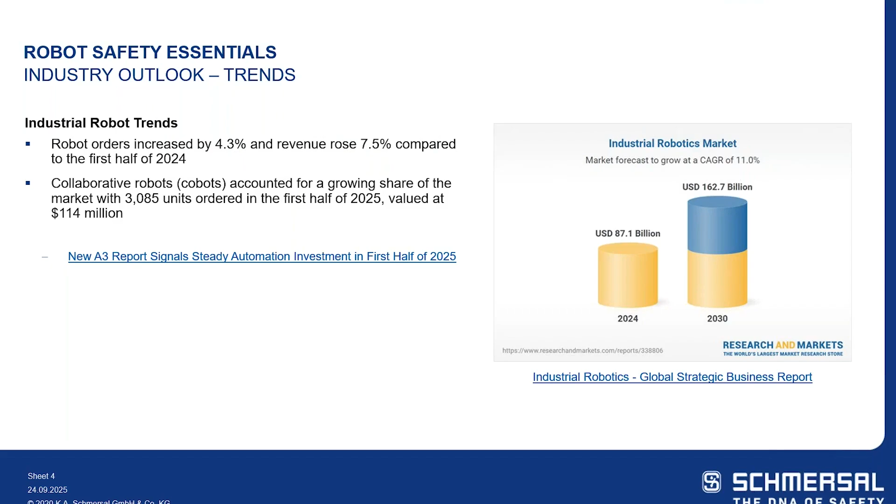I jokingly said I'm using air quotes when I use the term collaborative robots, and that's because that looks into some of the changes that have taken place with ISO 10218. Before I get into a high level comparison of the changes in the new standard that was just published, I want to take a quick second to look at the definitions of a robot and this collaborative term.

From 10218, we have the definition of an industrial robot, which is a machine that is automatically controlled, reprogrammable, or has reprogrammable multi-purpose manipulators, programmable in three or more axes, either fixed in place or fixed on mobile platforms for use in automation applications in industrial environments. So if you take out your checklist for this definition: automatically controlled, yes; reprogrammable manipulator, yes; you have an industrial robot, and these standards apply to you.

If we then look at the task associated with this robot, we ask: do we have a collaborative task, do we have a collaborative application? Again, look at the definition. A collaborative task is a portion of the robot sequence where both the robot application and the operator are within the same safeguarded space. A collaborative application is an application that contains one or more collaborative tasks, so they go hand in hand.

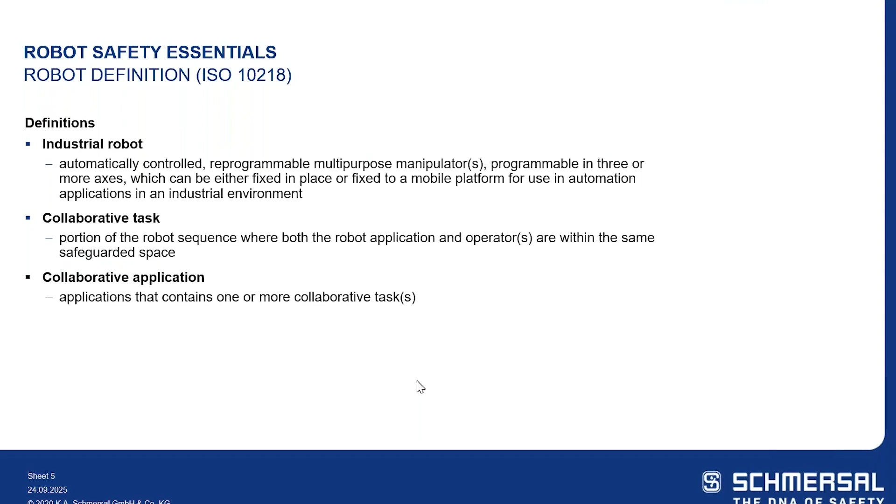So just a real quick look at the definitions as we prepare to dive into the standard. First thing is, do you even have an industrial robot? Sometimes that's the question. We might see a pick and place robot, but does that fulfill the definition of an industrial robot as far as 10218 is concerned?

This standard, ISO 10218, is a type C standard, which means it is for a specific type of machine. In this case, we are looking at the requirements specifically for robots, so 10218 is a type C standard for robots.

There is a part one and a part two. Part one looks at the general requirements for industrial robots, and I list here the scope as pulled directly from the standard. Part one specifies requirements for the inherently safe design, risk reduction measures, and information for use of robots in an industrial environment.

The standard also calls out the stakeholders, who should read this standard and who should be aware of it. They list robot manufacturers, application integrators, health and safety bodies, the regulators, robot application users including the employers and employees, and service providers such as maintenance personnel. Looking at that list, everybody who uses or touches this machine has some involvement in safety, from the manufacturer down to the maintenance personnel and the employees, so we have to take this standard into account, and again we look at the inherent safe design of this industrial robot.

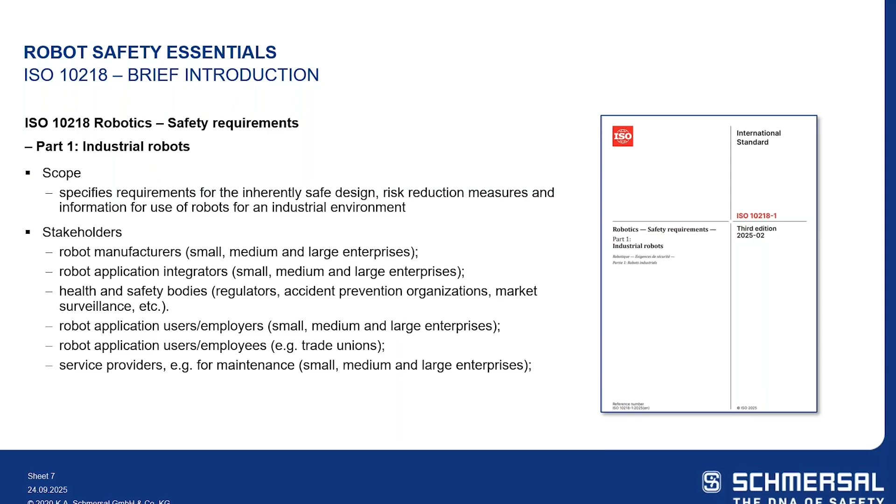Again, there are two parts. So we look at ISO 10218 part two, which looks at the integration of the robot. The scope here specifies requirements for the integration of industrial robot applications and industrial robot cells.

Who should be aware of part two? We look at the standard and it's the same list of people. If you are a manufacturer of robot cells, if you are integrating this robot into an application, if you are purchasing this robot, if you're using the robot, if you are servicing the robot, you will want to look into ISO 10218-1 and -2. Depending on your role, certain parts of the standard may apply more than others, but this standard applies to all the stakeholders involved with these industrial robots and collaborative tasks and applications, as we saw in the definitions.

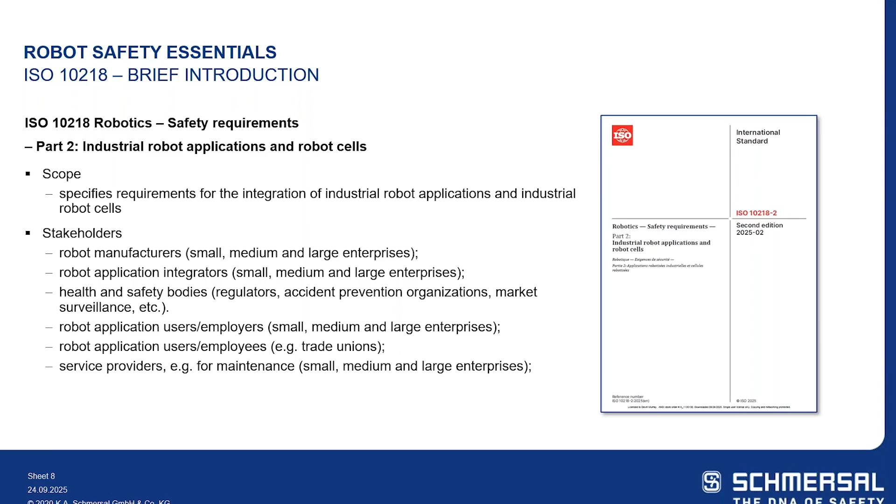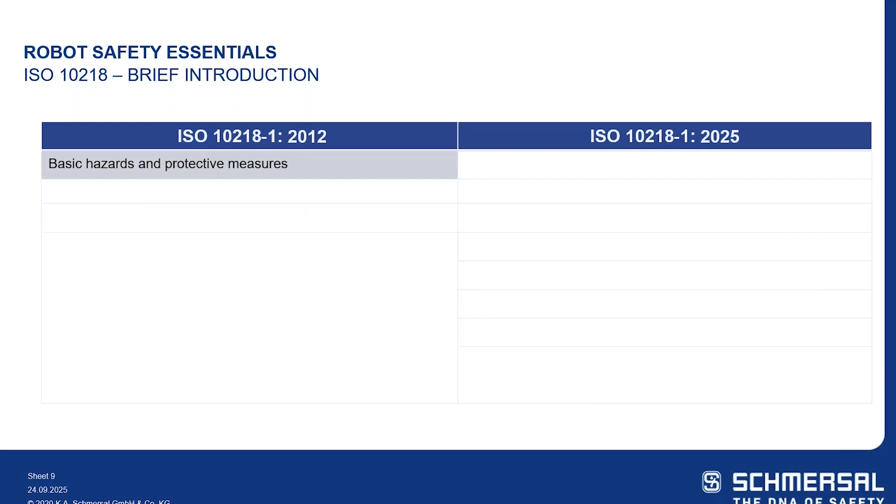So this is 10218. There's been a new or revised standard as of February of this year. We went from ISO 10218-1, last published in 2012, and looked at what that standard covers. It essentially covers basic hazards and protective measures for safeguarding robots, or the design of robots, for part one. They did talk about collaborative operations, but at a very high level. There was no mention of cybersecurity, and as you see with a lot of revised safety standards coming out now, they refer back to cybersecurity, thinking about industry 4.0 or the Internet of Things. So now we have to take that into account for our safety systems. This older standard addressed topics like stopping functions, safety-related control systems, and collaborative applications.

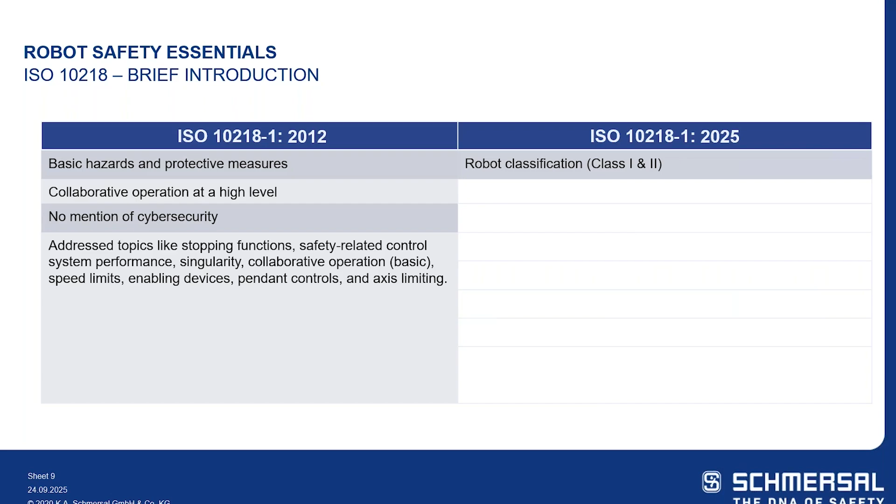But there were a lot of changes, a lot of things that they did not cover, as we now see in this list from 2025, and some changes as well.

With the 2025 revision, we now see this robot classification—there's a class one, class two. I'll describe that in the next slide, it's called out in this new 2025 standard. When you look at a class one robot, they will also give you some test methodologies to make sure you are within the specifications of a class one robot. They also, with this 2025 revision, talk about cybersecurity requirements, and they expand the capabilities of collaborative applications.

They updated their information for functional safety, because since 2012 there was a revision to ISO 13849, which is the standard for functional safety of machinery. The 2025 revision also incorporates the technical standard 15066, which was specific to collaborative robots.

The 2012 version spoke about collaborative operations at a high level. That's why there was the creation of ISO TS 15066, which went into more detail and also provided test methodologies to make sure that your pressure and forces, for example, did not exceed certain thresholds when you had those true collaborative applications.

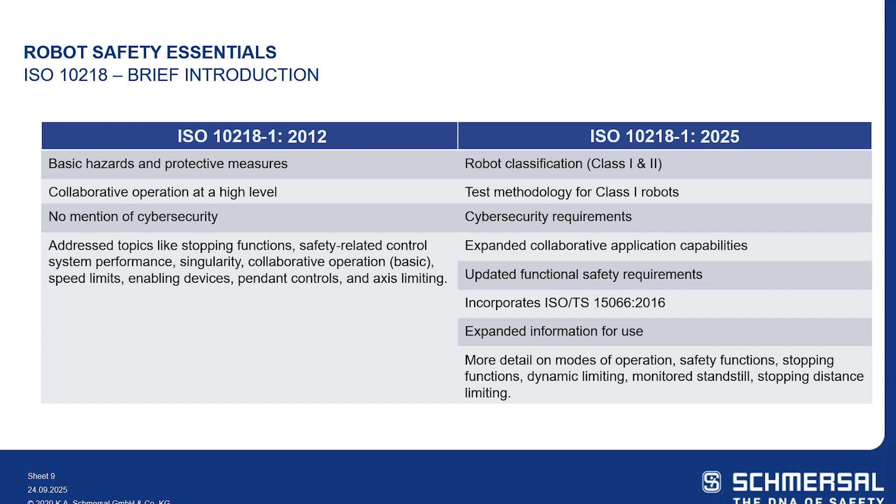They also expanded the information for use, providing more details for the modes of operation, safety function, stopping function, and dynamic limiting—again, more detail than what they presented in 2012. I'll come back to class 1 and class 2 in just a second.

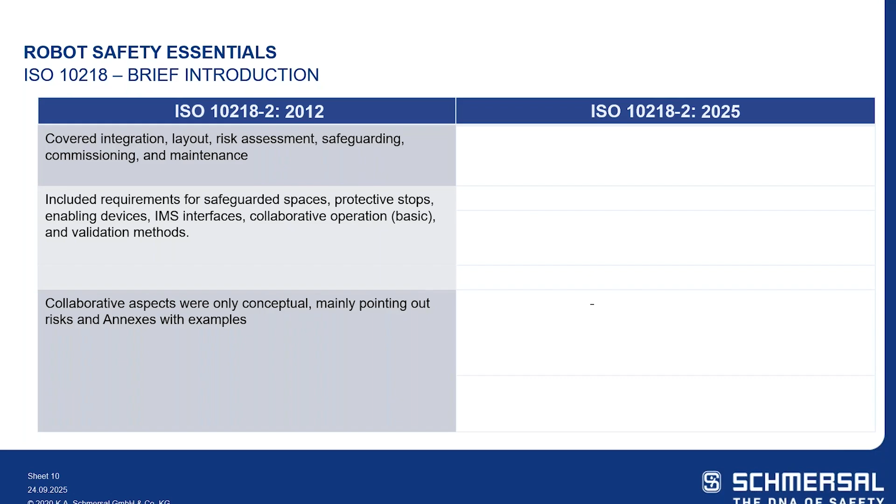When we look at the -2 version of 10218 back in 2012, they covered integration, layout, risk assessment, safeguarding, commissioning, and maintenance—trying to integrate this industrial robot into an application. They included requirements for safeguarded spaces and protective stops. Yes, they did mention collaborative aspects, but again at a high level, conceptually—much of why the ISO TS 15066 standard came out in 2016, to help guide those collaborative robot application questions and challenges.

What we see with the revision here in February 2025 is this shift from the idea of a robot system to a robot application. They now look at collaborative applications—this is now integrated into the standard. A lot of information from 15066 has been incorporated into the revised standard. They expanded the functional safety requirements with the updated ISO 13849 standard. With the integration of an industrial robot, they looked into cybersecurity, providing requirements, whereas before there were none.

New sections on end effectors, vertical transfer components, and expanded information for use. Another big one: the terminology updated from 'collaborative robot'—which is why I was using air quotes you couldn't see—to no longer using that term, and now looking at the term 'collaborative application.' This was huge, one of the biggest changes, because when we looked at this idea of a collaborative robot, I found, and I think it was widespread within the industry, a huge misconception of utilizing a collaborative robot—yes, it's inherently safe designed, so slower speeds and supposedly no pinch points.

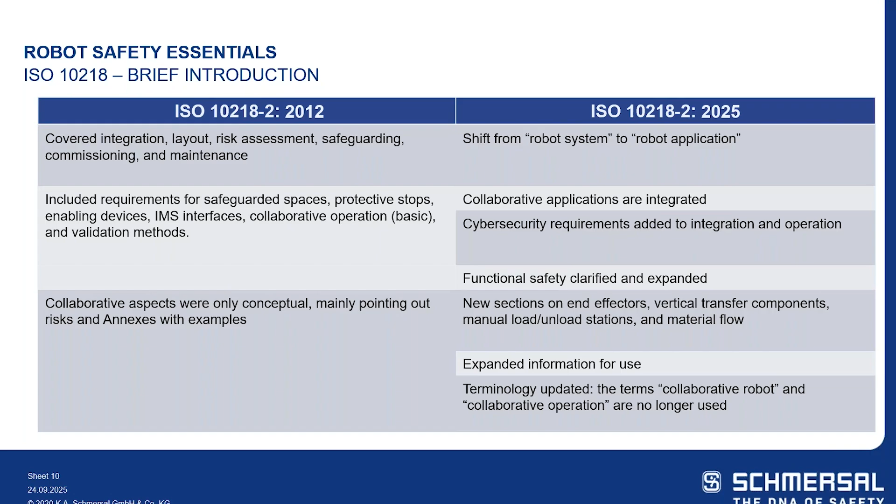Huge changes from 2012 to 2025, and there were quite some years in between the standards. So as we can imagine, there should be some sweeping changes for the positive for safety with these robot standards.

Really quick, I mentioned that we now look at these classifications of robots in ISO 10218, so there's two classes, class 1 and class 2. Here's a table pulled directly from the standard to give you an idea. The classes of robots are categorized by the mass per manipulator, the maximum force per manipulator, and the maximum speed of that robot.

If we look at the values of a class 1 robot, the mass per manipulator is 10 kilograms and under, and the force per manipulator is 50 newtons and under. The maximum speed is under 250 millimeters per second. Those are essentially the specifications that were for the collaborative robot term that's no longer being used.

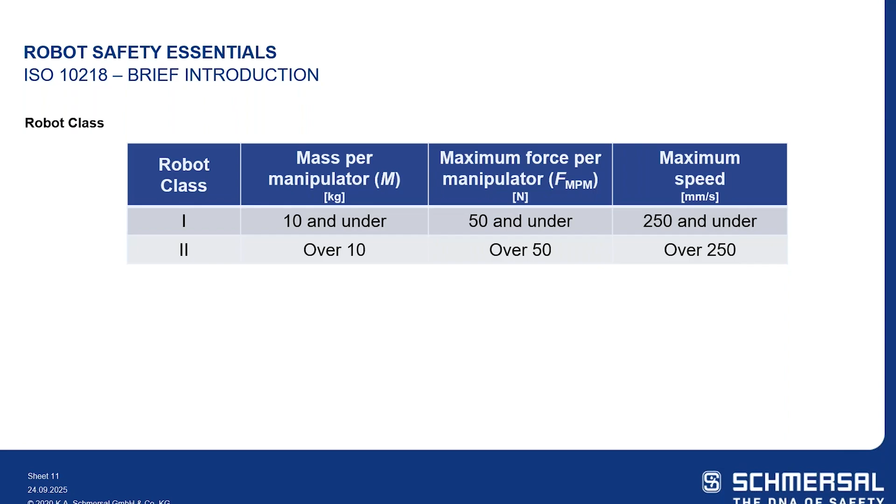Now we look at these specifications and say, if we are trying to have a collaborative operation, we want to see if we can use these class 1 robots. We no longer say we have this collaborative application, let's use this collaborative robot and call it a day. No, it's let's look at this class 1 robot for this application, and then the standard gives us some testing methodologies to actually test the pressure and forces of the robot, to make sure these forces and pressures do not exceed certain thresholds of the human body, so that we can utilize these in a collaborative task, side by side with the operator.

We can talk about this more later toward the end of the presentation. But again, some huge changes within the standard. A lot of the information they are describing with the testing is taken from ISO TS 15066.

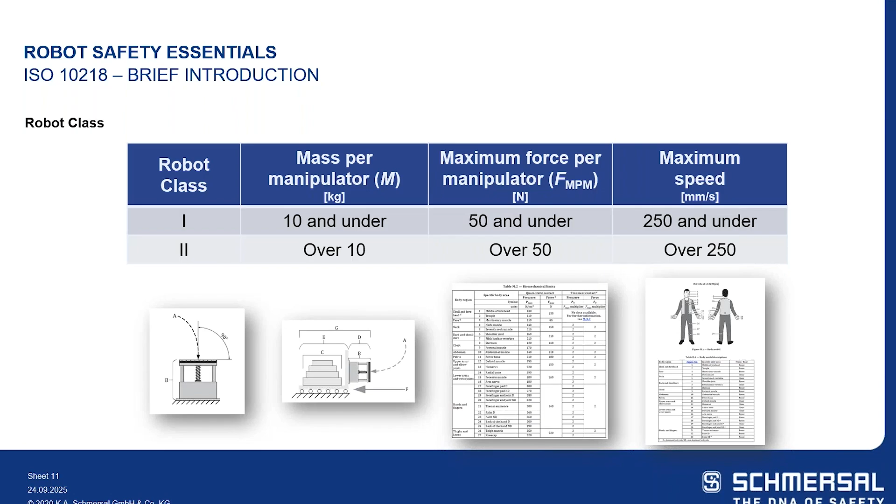Thank you, Devin. Now we will get into the safety requirements in practice, both for products and for our Tec.nicum services. The Schmersal Group is one of the international market leaders in the field of machine safety. We've got over 80 years of technical knowledge and special industry expertise in many fields of application, including food and beverage production, packaging technology, machine tool construction, lift technology, logistics, heavy industry, and the automotive sector, and especially in the field of robot safety.

So we offer a wide variety of robot safety products, from cutting-edge electronic safety devices to simple position sensors and various control accessories. We'll now discuss an overview of a selection of products that satisfy the requirements of ISO 10218 robotic standard, as well as our Tec.nicum group. Schmersal provides product and manufacturer neutral engineering services. We will feature some Tec.nicum solutions to help you comply with the requirements of ISO 10218 robotic standard.

Perfect, all right, so what I want to discuss and what you'll see moving forward here, let's look at the standard, and then let's look at some solutions. So if you look at some of the requirements from the standard, ISO 10218-1, and we look at the emergency stop section here, there'll be a lot of information from the standard. I won't read every word or every bullet point.

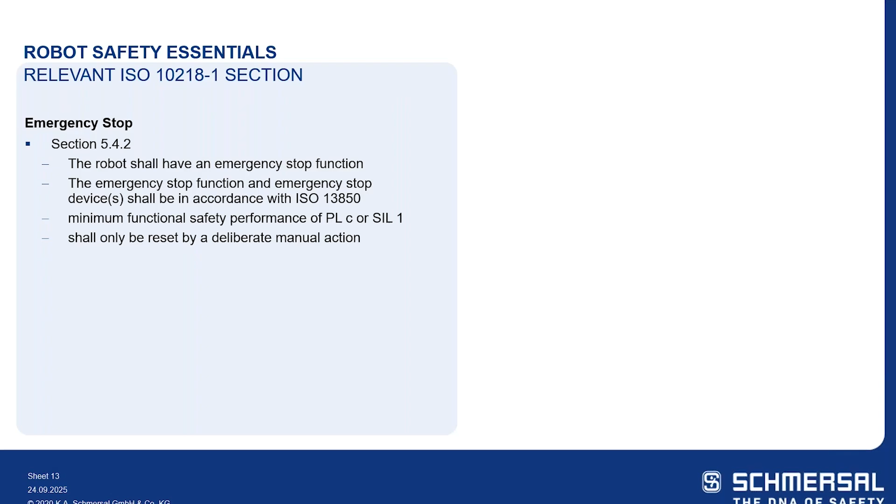They also call out that the e-stop shall only be reset by a deliberate manual action. This is also a requirement for an e-stop as called out by ISO 13850, in section 5.4.2.

In addition to the requirements of 10218, both NFPA 79 and ISO 13850 detail the physical characteristics of a push button type emergency stop operator, that red mushroom operator with the yellow background, that it be self-latching, and that once actuated it remains in that state until a voluntary and deliberate action has been performed, like twisting or pulling the palm button for manual reset. Resetting the e-stop alone does not resume operation; a second deliberate reset action is needed, such as pressing a manual reset button.

Both OSHA and standards such as IEC 60204-1 state that the emergency stop must be readily accessible to the operator. That means every operator station, or any area of the machine worked on that is part of normal operating procedure, needs a means for emergency stop, and it should be unobstructed and easily accessible without having to reach over, under, or around to actuate it.

I'll highlight two possible solutions. We have a full complement of emergency stop operators to meet various environmental conditions. I offer two simple kits. One is the BDF 100 series, a slim 40mm housing, impact resistant thermoplastic housing. That e-stop operator is available with or without a protective collar around the red button, has an integrated LED status indicator above the operator, and pulls to unlatch or reset the e-stop operation. It's fully wired with an M12 8-pin connection, so it's easily wired into the electrical panel.

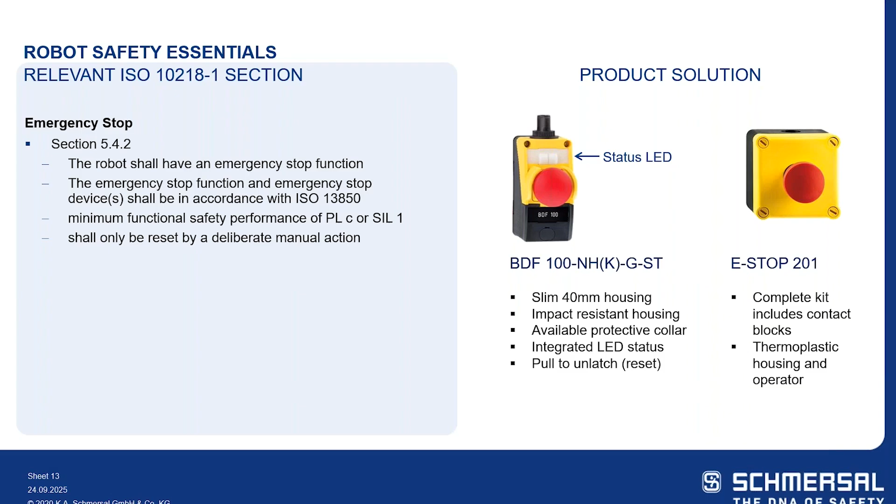Another complete kit is our e-stop 201. Where the BDF 100 gives you one open and two closed contacts, the e-stop 201 gives you two normally closed contacts. It's a complete kit that includes the operator, contact blocks, and thermoplastic enclosure with the yellow top, satisfying the requirements for a red operator on a yellow background. So those are just two examples of products we offer for an emergency stop in the robotic application.

If we move further down the standards, section 5.5.2 calls out an enabling device. With the enabling device they call out specific requirements, including a 3-position device as per IEC 60204-1. In the industry, an enabling device can be a 2-position or 3-position: a 2-position is off, on; a 3-position is off, on, off. They go into the definition of what that 3rd position means - that off position has to go into a stop, a complete robot stop, requiring a reset.

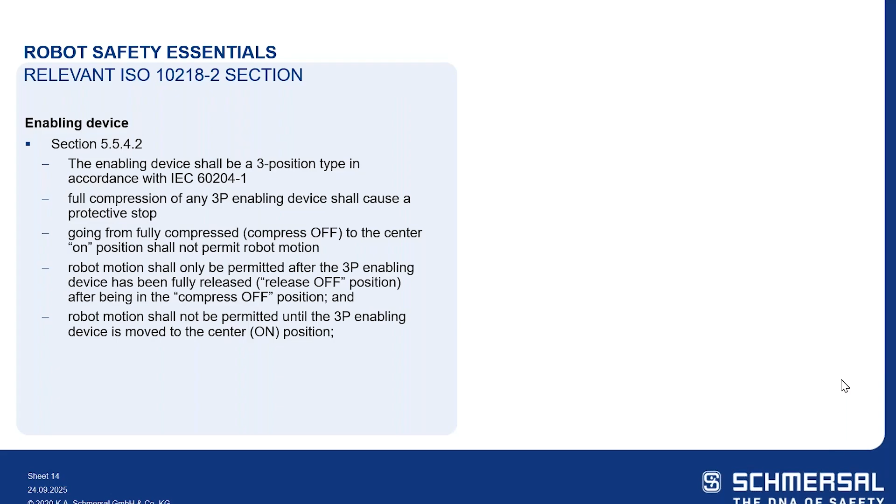The idea behind the enabling device's 3rd position, as called out by the standard, is that if you were exposed to a hazard, one of two things can happen: you can either drop the enabling device, so it's no longer in the middle position and goes off, or you tense up and compress it into that 3rd position, the compressed off position called out in 5.5.4.2. So this idea of a 3-position device, with each position called out directly by ISO 10218-2.

The product solution we offer from Schmersal is our ZSD5 or ZSD6 enabling device. You may know it as a live man switch, dead man switch, handheld enabling device, or grip switch - it goes by many names depending on who you're speaking with. It gives you that 3-stage operation used in robotic cells to provide operator safety during setup, maintenance, or troubleshooting activities, giving you off, on, off 3-stage grip switch operation.

You put the enabling device in the center position and hold it to perform setup, maintenance, or teaching the robot. As soon as you release the button or press it all the way down, the system interrupts the control command, and the contacts do not close when resetting from position 3 back to position 1. The ZSD5 is simply the grip switch. The ZSD6 enabling device gives you an additional push button integrated into the device head for jogging functions, and both offer an ergonomic design.

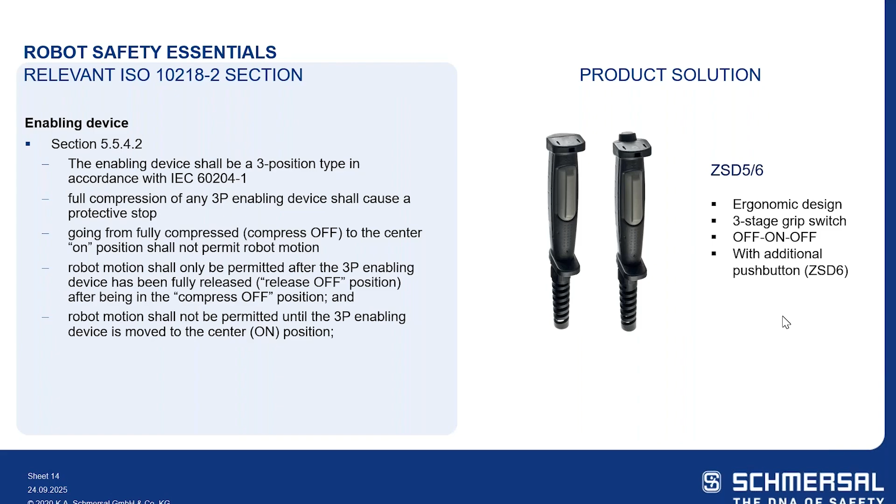If we start to look into some of the applications within ISO 10218-1, 10218-2, we look at what they call out in section 5.5.5 for a monitored standstill. When we look at applications, the robot stops, we interrupt the light curtain maybe, or request to enter, and we have a robot stop.

And we have a standstill situation. If we are not interacting with this robot, or feeding it a part, or whatnot, it's not enough to state that it's at standstill. We have to monitor this standstill, because if we're not removing power from this robot, and it's only at a standstill, we need to make sure that if the robot were to move, we then put it into a safe stop, maybe either stop category 0 or 1 based off your risk assessment, as defined by IEC 60204-1.

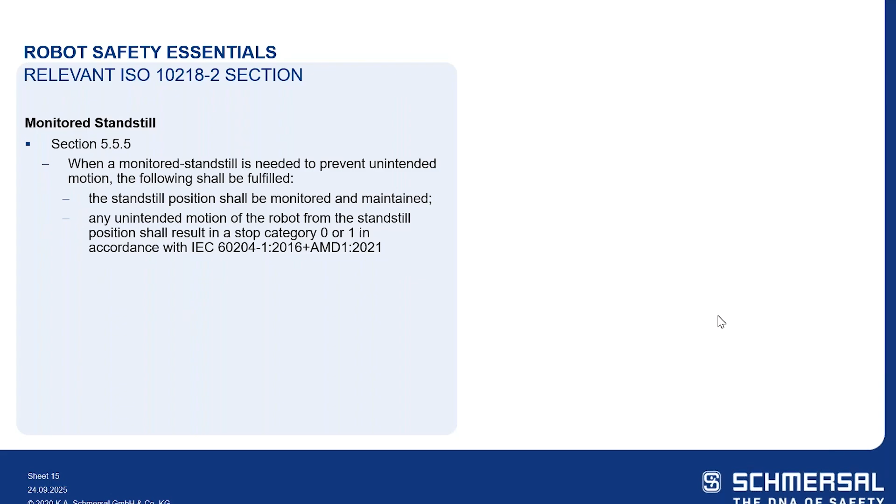So yes, we're stopping the robot, but if we're not removing power from this robot with our safety circuit or lockout tagout, we then have to monitor to make sure that this robot is not moving. And that's the idea behind a monitored standstill safety function.

Schmersal has a few options to provide you with that standstill monitoring, that monitored standstill. Our PSC1, our programmable safety controller, gives you that programmable compact controller with built-in I/O on the main module, with various different I/O extension modules that will ensure the safe signal processing of the e-stop buttons, the light curtains, the safety door interlock switches, and other electronic and mechanical safety switching devices. And it's possible to safely monitor multiple axes using numerous functions, so it's modular and freely programmable.

We offer the PSC1-C-10 with safe drive monitoring for 1 or 2 axes, and the PSC1-C-100 with external safe drive monitoring modules, giving you the ability to monitor a maximum of 12 axes, giving you your safe shutdown with safe torque off, safe stopping with safe stop 1 or safe stop 2, safe operating stop, as well as safe movement, your safety limited speeds, your safe direction indication, safe monitoring with safe cam, safe positioning with safety limited positioning, safety limited increment, safe emergency limit. That drive monitoring is carried out depending upon the application requirements with 1 or 2 encoder systems. And a connection to all common field bus systems can be established with a universal communication interface to bring that information back to any existing communication field bus network.

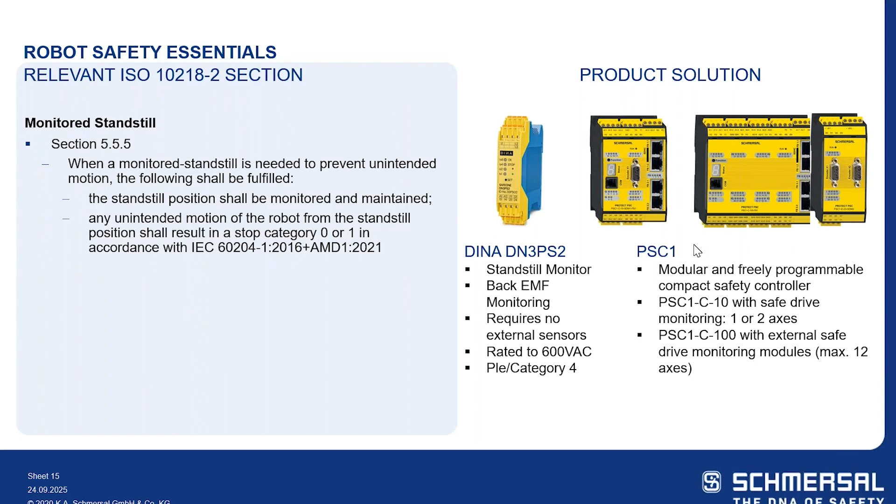I was going to say this is important, but they're all important. But I think the monitored standstill is one that's overlooked a lot.

5.2.6 for actuating controls. Some of this kind of makes sense to us, right? It's like, well, of course. But 5.2.6 calls out the labeling for actuating controls, and that the label shall clearly indicate its function. And of course that makes sense, right? If we have a button, we want to know what that button does.

But if we look at some older robot systems that have been in use, and we look at the pendant station on there, the controls on there, maybe some of the labeling is rubbed off, right? But it's been used for some years, and everybody knows what that button does, so everybody thinks we don't need the label on it. Well, we do, and that's called out specifically within the standard.

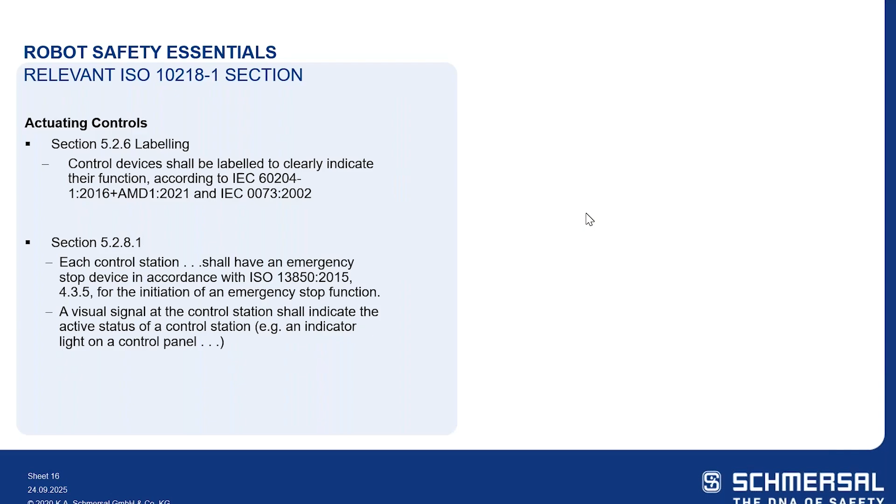5281 for the control stations also calls out the requirement for an e-stop on that control panel or on the actuating controls. And also that last note there for a visual signal at the control station shall indicate the active status of the control station. So again, yes, labeling makes sense, but something we have to remember for older equipment, and then also that e-stop.

Schmersal has a solution for that with an abundance of different control panels available, 3 different series depending upon the size. Slim 40mm wide housings, impact resistant thermoplastic. The BDF 100 again is that single operator.

You can have an e-stop and or the various different types of other control devices, as well as multiple operators into the BDF 40, which is a slim housing, a slimmer footprint than the BDF 200. So again, up to 4 operators in one housing. You can incorporate the e-stop into that control panel, and or you can have another panel with 4 other operators.

That can range from illuminated push button selector switches, LED indicator lights, pilot lights, keyed operated selector switches, and standard push buttons, giving you the various machine or process controls conveniently located at each guard door. And then they can be configured and field labeled as required in the standards to user-defined application needs, including integrating that emergency stop operator as well.

The reset of functions, 5522 from ISO 10218-1, and they also called out another unintended reset requirement in part 2. But for part 1 and 5522, the reset function shall be provided to reset the interlock, and allow the resetting of the internal robot safety functions.

Right, this reset has to be a deliberate action. We look at this reset function, we want to look at the idea of that monitored manual reset, or that 24 to 0 volt transition, to make sure that we are avoiding a failure with the reset button that would then turn it into an automatic reset, for example. We also want to make sure that we are preventing an unintended reset.

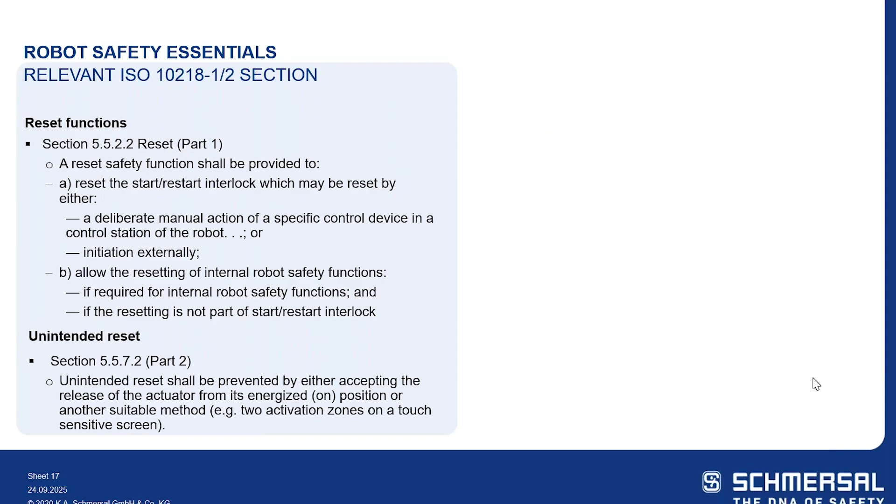Part 2 goes into more detail, and we look at the integration of this robot into a robot cell or robot application, and it states that an unintended reset shall be prevented by either accepting the release of the actuator from an energized on position, that's that monitored manual or 24 to 0 volt transition reset, or they give an example of activation of 2 zones, like on a touchscreen, which is considered a double reset function, trying to prevent the unintended reset.

So in addition to the control devices that we offer just for your standard manual reset, we also offer solutions to convert any standard reset circuit into that double reset circuit. So you're enhancing the safety function of a standard safety controller or safety PLC.

It prevents the reset of the machine or the equipment if the operator is inside the hazardous area who may not be seen. So when you do have an operator that you might lose line of sight, they begin that resetting procedure by first actuating a reset button inside the walk-in area, after leaving that area and having the presence sensing device like the light curtain cleared, or re-engaging a safety interlock that's on the guard door, and then actuating that second reset button outside within a predetermined time required to restart that operation.

And that sequence and that time prevents the starting of that machine based on visual inspection alone near a reset button located away from the view of potential hazards.

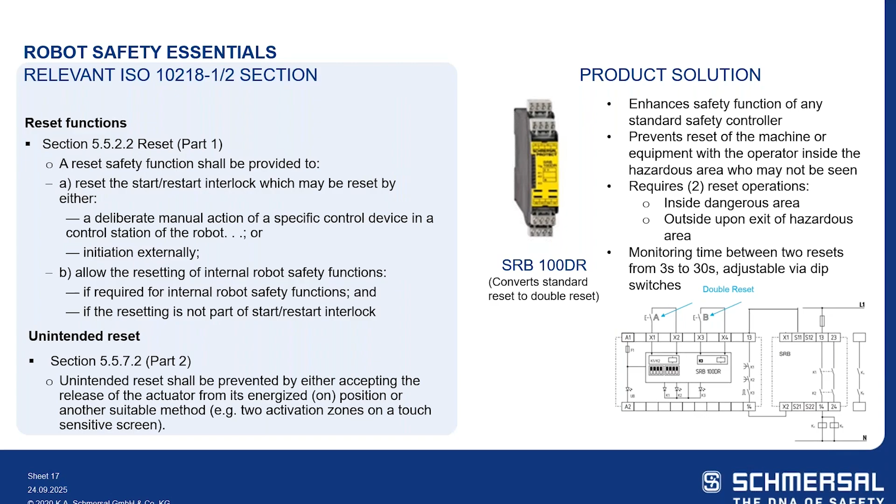And then there's your reset function also. This application of a double reset we'll see later on, because we can also use that in place of some other safety function, but we'll see that later on again. Still some information to go through, looking at the time, but I think we're doing good, right?

Going back to ISO 10218-2, we look at guards, 5.8.5 for guards, and they call out another standard, ISO 14120. They say that the guards shall conform to ISO 14120. The fixing system shall remain attached to the guards, which means that the fasteners are captive to that guard. So if there's 10 fasteners on that guard and you unscrew 10 fasteners to remove that guard, those 10 fasteners remain captive, so 10 fasteners come off, 10 fasteners go back on.

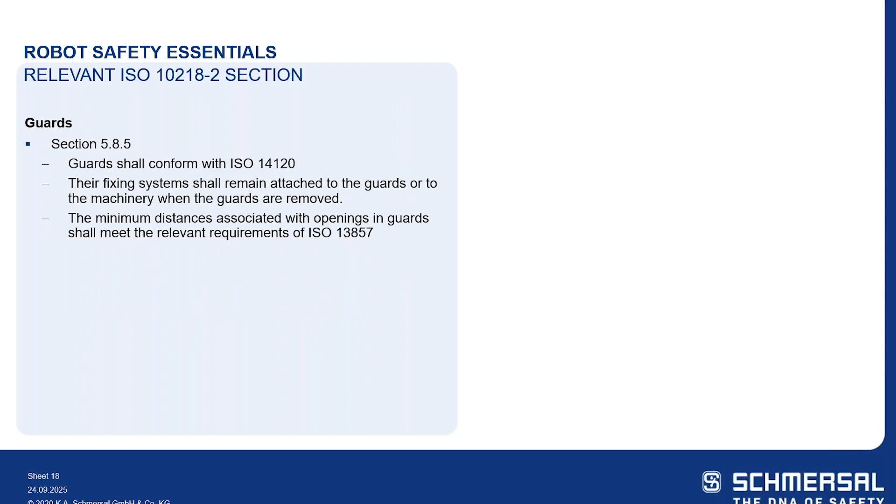The minimum distance associated with the openings, they call out ISO 13857, making sure that we can't reach the hazard by reaching through the openings of the guards.

So yeah, we've partnered with a company called SATECH out of Italy, and it's a modular fencing system perfectly suited for industrial robotic applications, made of low carbon steel for strength and durability and potential impact areas. The construction methods used of the assembled system are impact resistant up to 1600 joules in ISO 14120 dynamic resistance tests, exceeding the standards set by many automotive manufacturers.

We will offer two particular series: our Fast Guard, which would be the fastest assembly, where the panels are slipping onto the footer assembly. There's no posts needed, just bolt connections on the footer and coupling clips for the tops. Or the Impact Guard, which would be our maximum impact resistance. Bolt connections, threaded holes in the posts, extruded steel tube posts that are 40 or 60 millimeter profiles.

All the modular designs meet all regulatory standards. They install quickly and easily. The fencing mesh itself is the 17 by 97 millimeter slot, so that narrow opening allows them to be mounted 120 millimeters from the danger zone, but also deters workers from climbing the fencing. There's no toe holds, and the panels are black, making visibility very easy into the robotic cell.

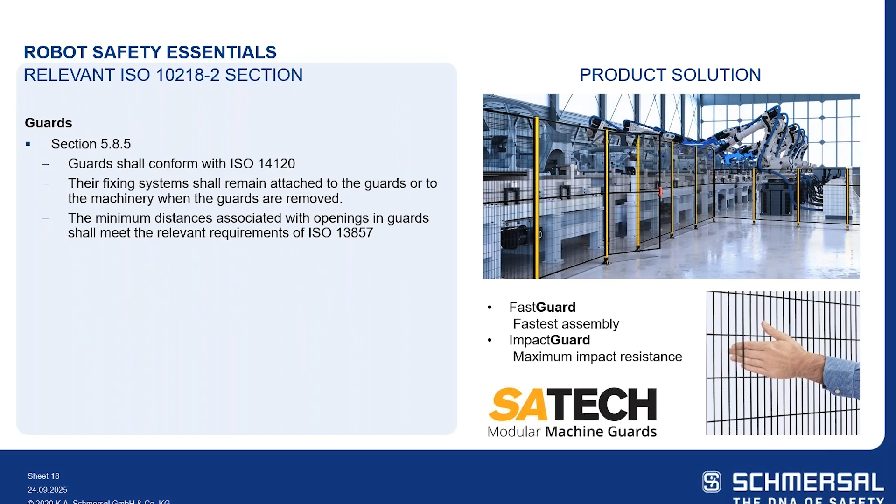Going from fixed guards, right? We look at the hierarchy of control measures and see what we can do for risk reductions. Yes, if we can provide fixed guards around the cell, perfect. But of course, if it's a robot cell, we're going to require some access at some point to that robot cell.

So the standard calls out interlocks, right? They call out within 5.2.4 that the interlock shall conform to ISO 14119, and this standard helps with the selection of interlocks. There are different types of interlocks, and they help you understand how to mount certain interlocks and how to prevent bypassing of certain interlocks. So that's ISO 14119.

And then the idea is once we have a guard that can move, those guards have to be interlocked. Right, so we interlock these guards with interlocks designed to ISO 14119. Okay, and then they go into some more requirements for interlocked movable guards. So movable guards should only open laterally or away from the hazard.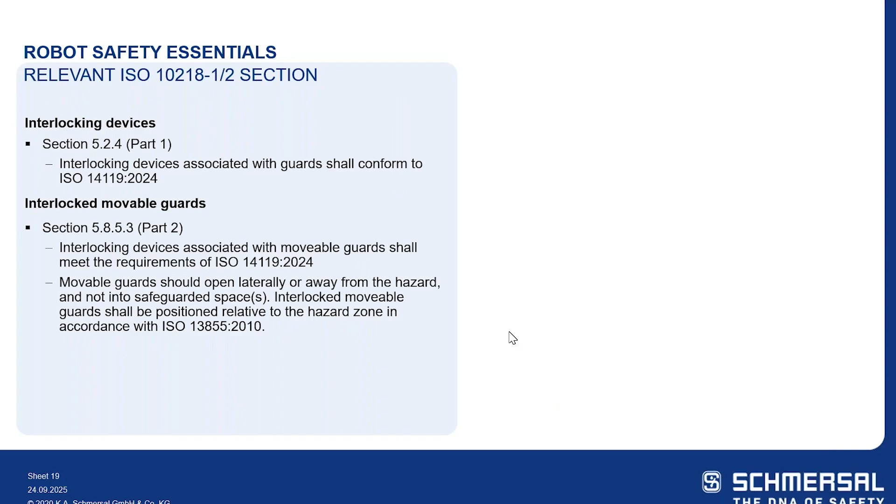So some things we want to make sure we consider when we are doing our design for the movable guards for these full body access areas, or even areas where we open the guard to interact with the machine. Okay, so again, some things to keep in mind.

And in the design, there are 5 different types of interlocking devices according to ISO 14119. You've got your type 1 uncoded mechanical operation, your type 2 coded mechanical operation, your type 3 uncoded electronic operation, your type 4 coded electrical or electronic operation, and then of course, newly added this year, an update to 14119, their type 5 key transfer or key exchange system.

Selecting the type of device to be used is based on a wide range of factors: the desired safety level to achieve, the subjected environmental conditions, your cycling time for using the switch, and of course that possibility to manipulate the device and prevent willful bypass. This allows the design of that safety switch to range from a classic limit switch all the way up to a uniquely coded microprocessor-based device, depending upon your application criteria.

All right, and when we look at these guards, these interlocks for these movable guards, the standard is saying that you go to the guard door and you can open up the guard door at any time, right? Based off of the safety circuit, which we then have to look at ISO 13849 for the safety functions, what performance level that safety circuit is designed to. But as soon as you open up that door, that safety circuit's going to trigger that safe stop.

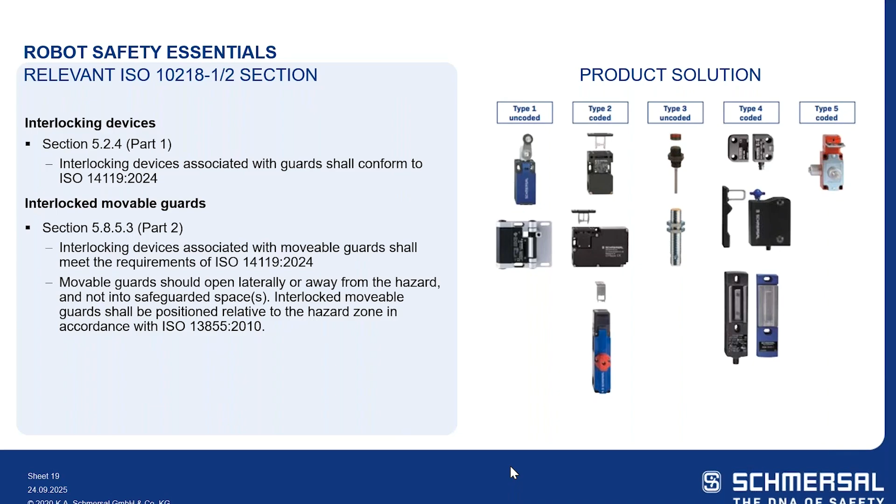ISO 10218 also looks at the situation if you have a guard that requires locking. So we look at interlocked movable guards with guard locking. This is section 5.8.5.4. They call out specifically that the locking shall conform with the following: permit the actuation of a hazardous machine function only when the guard door is closed and locked. So looking for those two functions, the guard door has to be closed and locked before you receive a safe signal to allow the robot to run, right?

Before we can reset that safety function, we have to keep the guard door in a closed and locked position until the risk or harm due to the hazardous function has stopped. Okay, so we have to keep the guard door closed and locked.

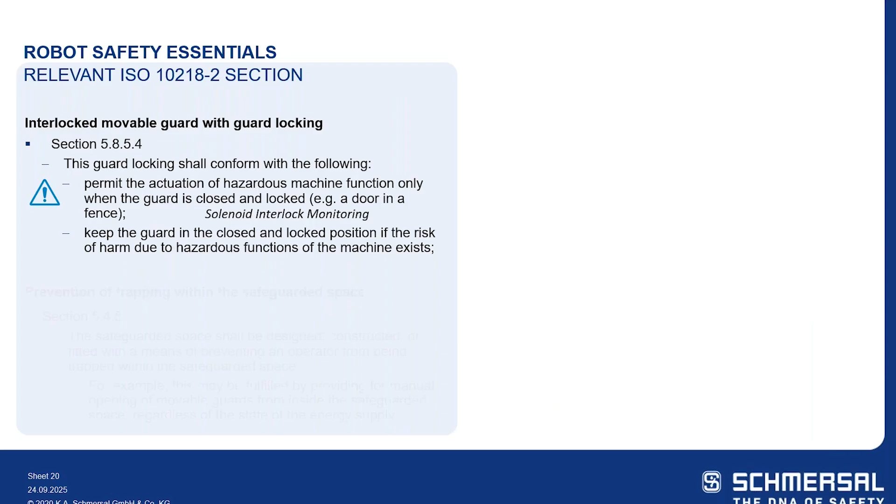Then, if we look at the situation where we have full body access, if we have this idea of a locking guard door, Section 5.4.5 goes into detail to prevent someone from being trapped inside of the hazardous area. Again, this is something that I see overlooked more than it probably should be, right? If you have full body access and we can lock the door, we need to make sure someone can escape from this hazardous area, and that does not matter the condition of the lock switch.

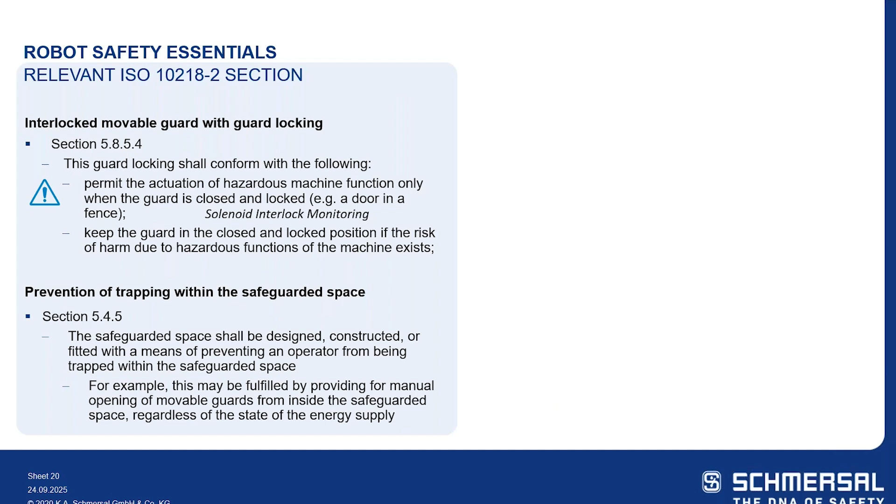So if that locking switch is in the locked state, we must be able to unlock it from the inside and escape this hazardous area. That is the requirement from ISO 10218 for lock and guard doors in full body access areas.

And that guard locking function is safely monitored, so that's your solenoid interlock monitoring. Schmersal offers an abundance of solutions working under different operating principles. You have your electromechanical, as well as electronic RFID-based and bistable operation with integrated emergency exit options.

Our AZM40 is a compact flat design. It's a bistable operation, meaning that it remembers its last lock status in the event of a loss of power, with 180-degree flexibility of the actuator and an inside emergency egress lever or push button option.

The AZM201 series, again another electronic, RFID-based unit that allows individually coded actuators to enhance tamper resistance, includes a door handle actuator assembly with a one-hand emergency egress. Hit the red handle from the inside and let yourself out easily if you become trapped inside a whole body access guard.

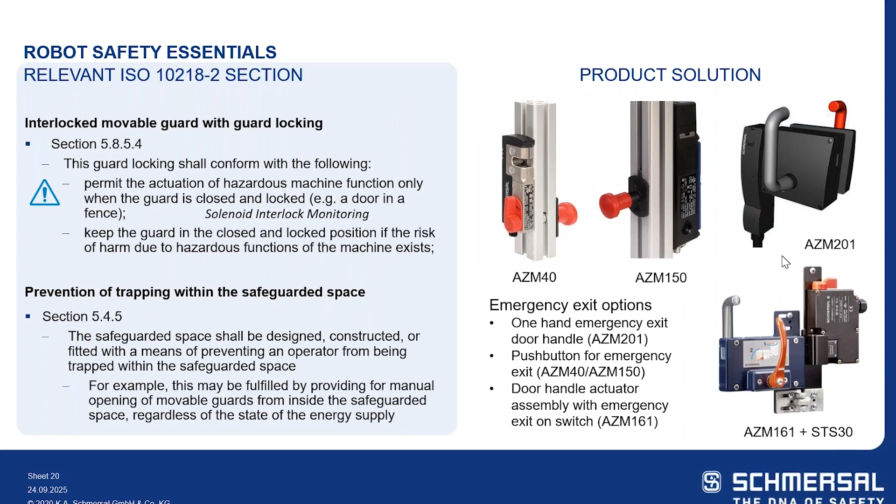The AZM150 is a traditional electromechanical type switch with a slim housing, again with inside emergency egress levers or push button options, available with various contact arrangements. Then our AZM161, along with its associated STS30 door handle assembly, has an inside emergency release on the switch and on the door handle, allowing emergency egress if trapped inside, again with various contact arrangements available.

Then they also talk about sensitive protective equipment, which can be light curtains or light grids. At a high level, these devices must meet IEC 61496, which is a type B standard. So at the end of the day, just know that if you use a light curtain or a laser scanner, it must meet the IEC standards. Take a look at those mounting instructions and make sure you see those IEC requirements called out. We won't go into full detail of those requirements, but know that ISO 10218 calls that out.

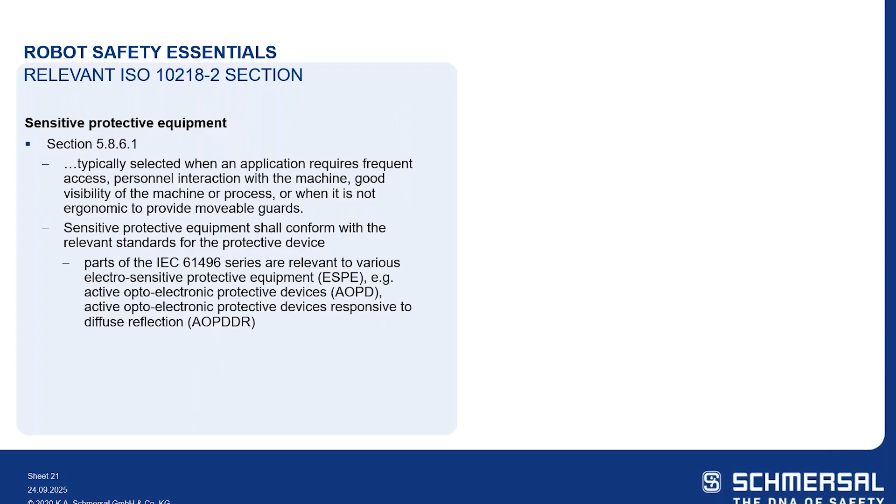And they gave an example of when you might want to use sensitive protective equipment. Before, we looked at guards opening and closing, but maybe you have a high-frequency application constantly opening and closing the guard door to interact with the robot. That may not be the best solution, maybe even an ergonomic hazard. So we can look at something like a light curtain. Once we interrupt the light curtain or laser scanner, we'll go into a safe stop.

Schmersal has a solution with our unibody four-sided construction light grids, typically used for presence detection and perimeter guarding. IP67 protection is standard, with an IP69 protective housing available for applications requiring high temperature or high pressure washdown, typically in hygienic areas. They feature LED status end caps and a 7-segment display. That unibody four-sided construction makes it more robust but lighter weight, since it's four sides plus the lens.

Integrated blanking, integrated contactor control, reset, double reset, beam coding, a high range up to 20 meters with a Bluetooth interface. That Bluetooth allows data transmission to either Android or Apple smartphones and tablets through our Schmersal SLC Assist app, giving you a diagnostic tool that allows for safe operation setup and documentation, showing operating modes, OSSD status, the status of the protective field, the number of cycles, and so on.

And the safety laser scanners, we now partner with a company called Hokuyo, and it's a very compact size, one of the smallest on the market, a lightweight safety scanner that can be mounted in confined spaces, also for presence sensing, giving you a 270-degree detection angle, a 5-meter protection zone, a 20-meter warning zone, or the option for dual zone monitoring.

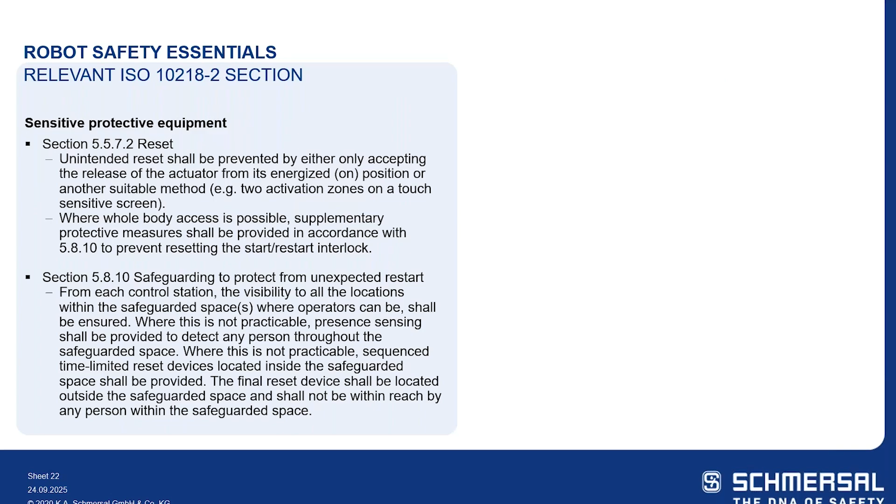So essentially, if we have the idea of a full body access area, and we have light curtains monitoring this full body access area, for example, and someone enters the hazardous zone, this robot cell, we have to make sure that we can't restart this robot system with somebody inside. Yes, there are other safety functions we can implement, such as a laser scanner to monitor the inside area, or safety mats, but depending on the area within this robot cell, that may be difficult to guard with mats, and maybe costly with scanners.

So we have this idea, or the standard brings this idea, of a double reset using light curtains. We have 2 series, the SLC 440 and the SLC 445, that offer that double reset to prevent restarting of the equipment when full line of sight is not achievable and someone's within the danger zone, and they're very easily programmable on our 2 different light curtain series.

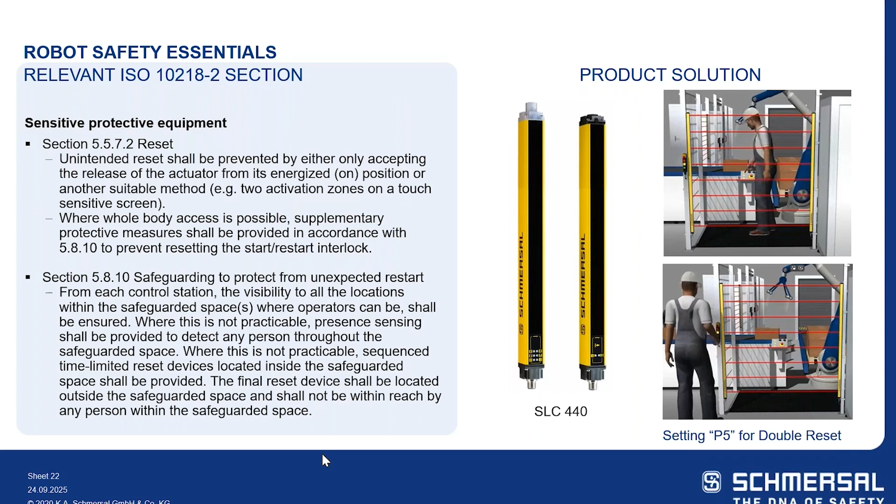Perfect. The standard also goes into detail, and they refer heavily back to IEC 62046 for the different functions of a light curtain. So depending on application, you may have to implement blanking of the infrared beams, perhaps to allow material to leave an area, or if there's ejection of a part from this area.

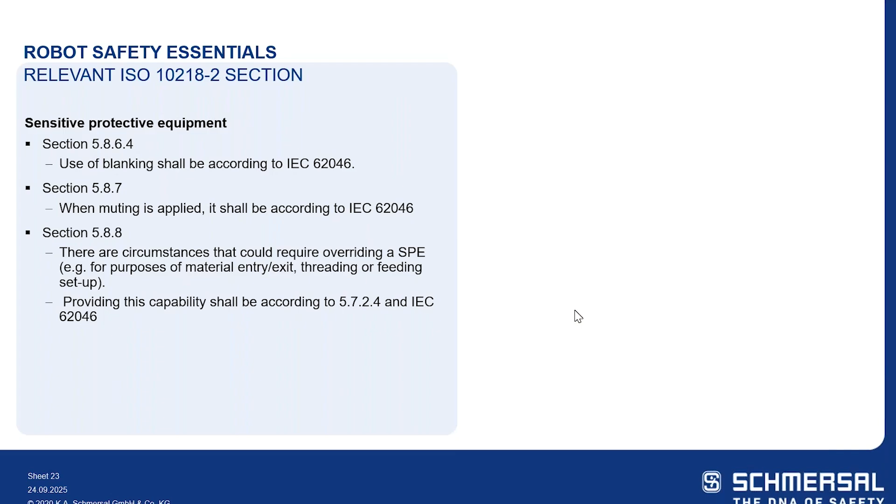Or muting, if we have to look at palletizers and muting pallets going in or out of a hazardous area. When you look at muting with pallets, if there's a situation where a pallet is stuck on a conveyor, section 588 calls out the requirement that there has to be a way to essentially override muting to allow this pallet to clear the muting sensors. So again, that's also called out in IEC 62046, but that's now been referenced in ISO 10218-2.

Our SLC 445 has integrated built-in muting, in addition to all the features of our standard light curtains with blanking, which can be fixed or floating. The muting offers various options for different sizes of objects: partial muting, palletless muting, material loading with gaps, unforeseeable belt stoppages. So we offer integrated blanking or integrated muting, along with complete muting sensor kits, in addition to other features like PSDI and multi-scan with our SLC 445 series.

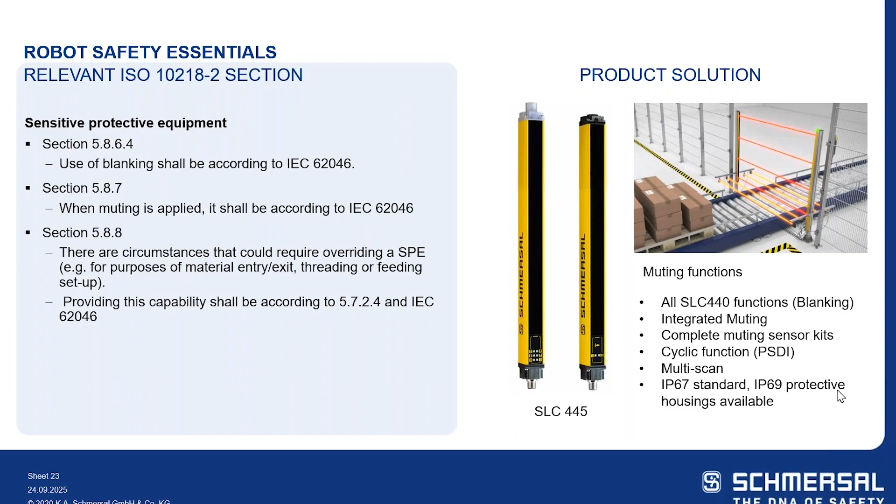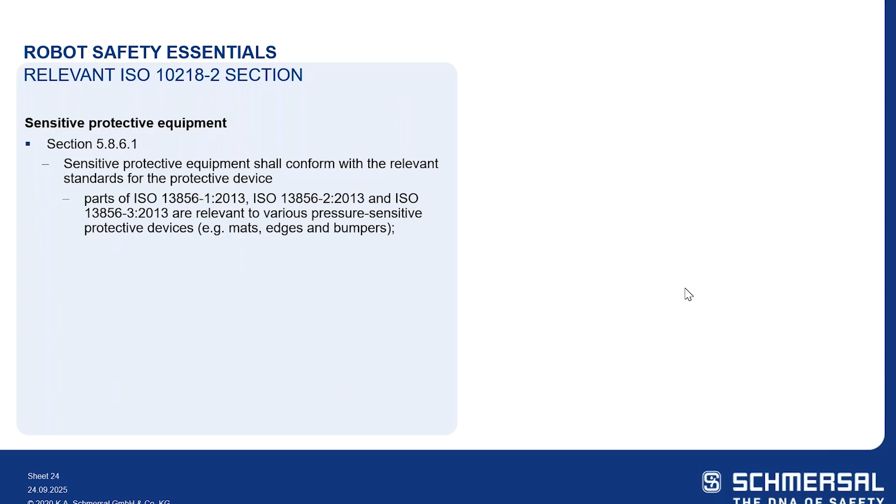And then 5861 again calls out another standard. This one calls out ISO 13856-1, -2, and -3, but they're looking at safety edges, mats, and bumpers. So depending on the application, if you need to use a safety edge, mat, or bumper, this standard is just saying that those devices need to conform to ISO 13856. We're not going to go into detail of what that is, just note that's what you're looking for, and make sure you see that inside those mounting and wiring instructions, as you would see for the product solution we have here.

So our safety mats and edges provide that tactile physical presence sensing. Our standard safety mats come in 6 different standard sizes, industrial grade slip-free SMS4 style with a separate aluminum trim kit, and SMS5 offers that fail-safe integrated PUR rubber ramp rail trim built right into the safety mat system. Our safety edges are used wherever you have moving edges that could jeopardize the safety of persons or objects, with our fail-safe optical safety edge system. All three of these will be utilized with an appropriate safety controller to create that fail-safe tactile physical presence sensing.

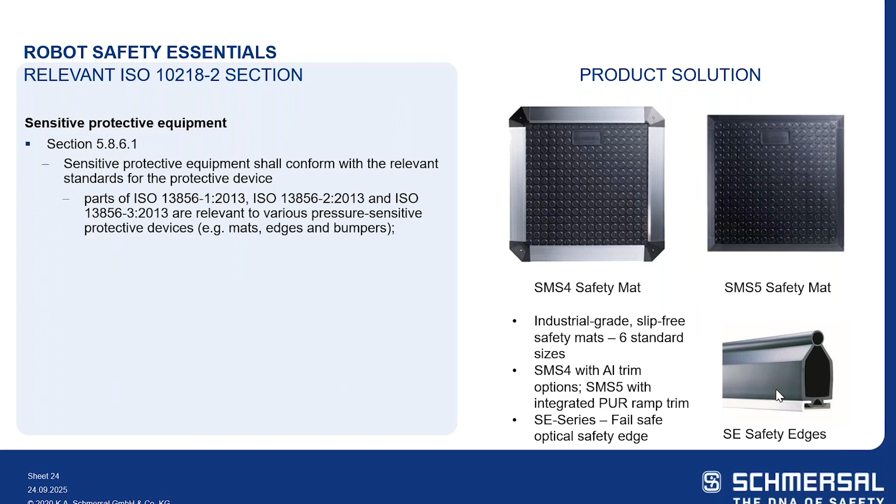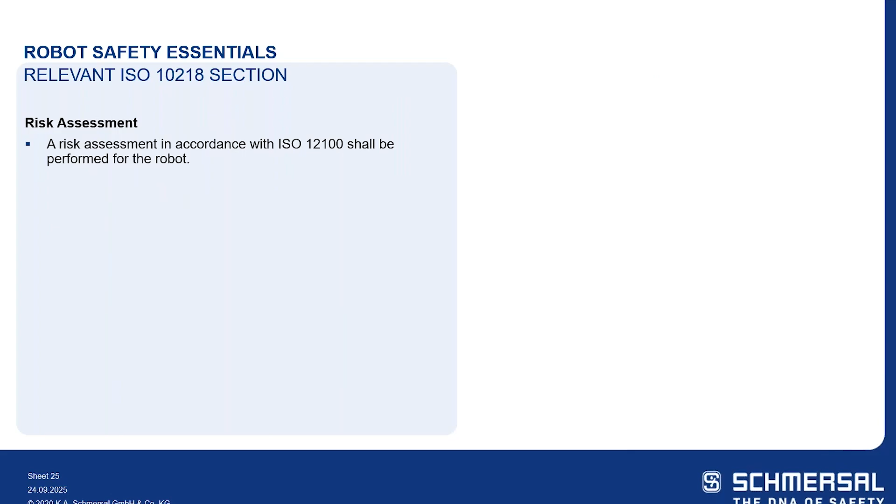Perfect. And as Dawn mentioned at the beginning of this section, we have products from Schmersal that can fulfill, as we saw, the requirements from ISO 10218. But also, again, we have Tec.nicum services, and with me being here in the services division, we want to highlight some of those services as well. So ISO 10218 calls out specifically the risk assessment, and even though the standard provides us guidance for safe design and safe integration, it tells us we have to do a risk assessment for our particular application.

Tec.nicum services, we provide that service for a risk assessment. The standard 10218 calls out specifically, as an example for a risk assessment, ISO 12100, and we do use ISO 12100 as our base for doing a risk assessment. For collaborative applications, the standard says yes, you still need to do a risk assessment. Again, that term collaborative robot no longer exists, right? So that kind of helps with this argument - even if you have a collaborative application, you need to do a risk assessment, and Tec.nicum services does provide that as an offering.

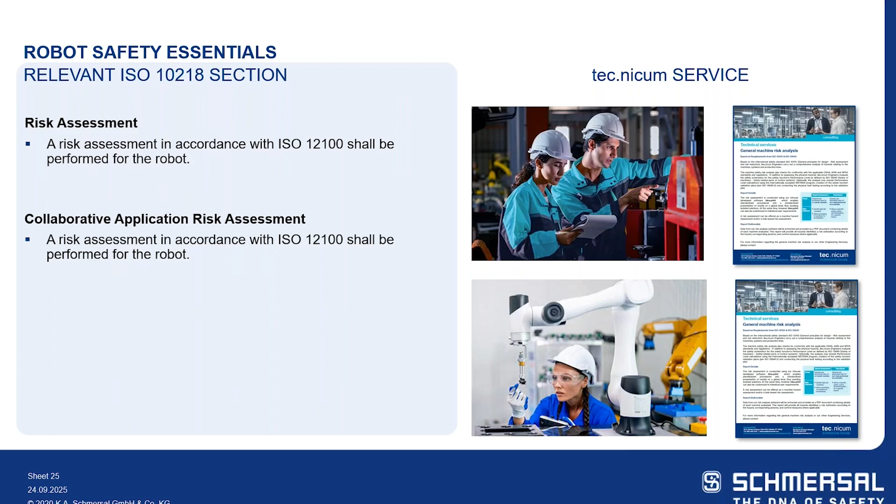Also, when you look at some of the safety functions within ISO 10218, they call out having to make sure certain guards or protective measures, like Dawn mentioned for light curtains and safety mats - the standard talks about speed and separation monitoring, or SSM. Making sure we are at a safe distance so the robot can work at its normal speed. The closer you get to the robot, it starts to slow down until you enter that hazardous area, so the robot can go to a safe stop.

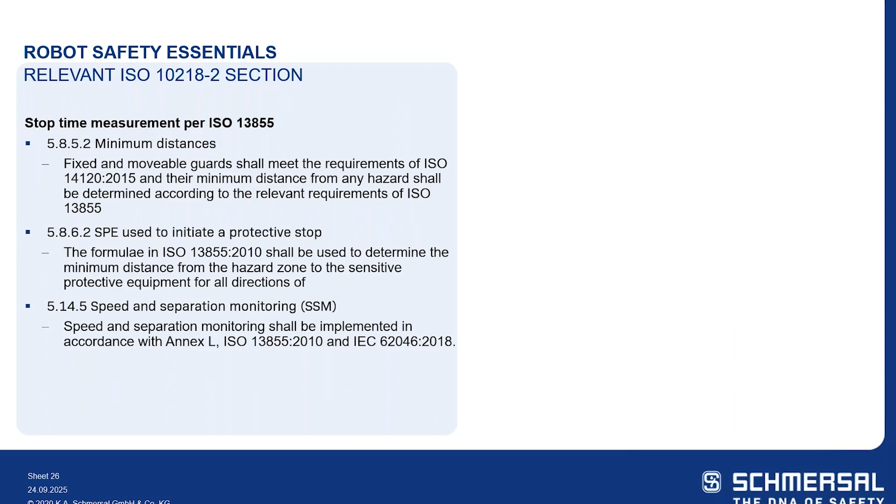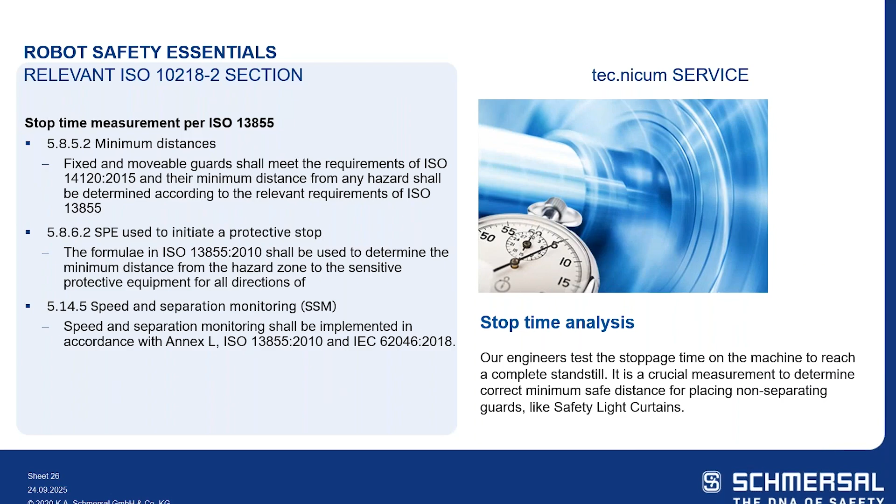In order to implement these devices or functions, you have to do a stop time analysis, and the standard calls that out specifically, referencing ISO 13855. tec.nicum Services offers the services to do a stop time analysis, and we also perform those calculations for the safe minimum distance for those functions and products.

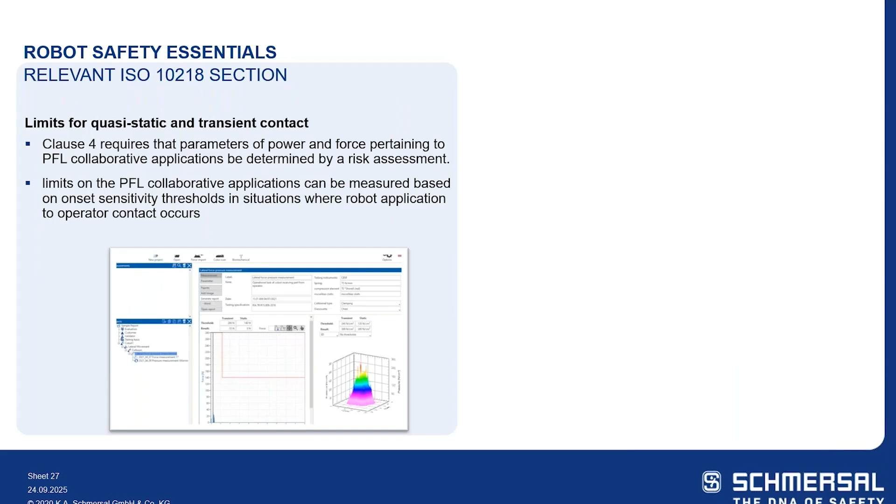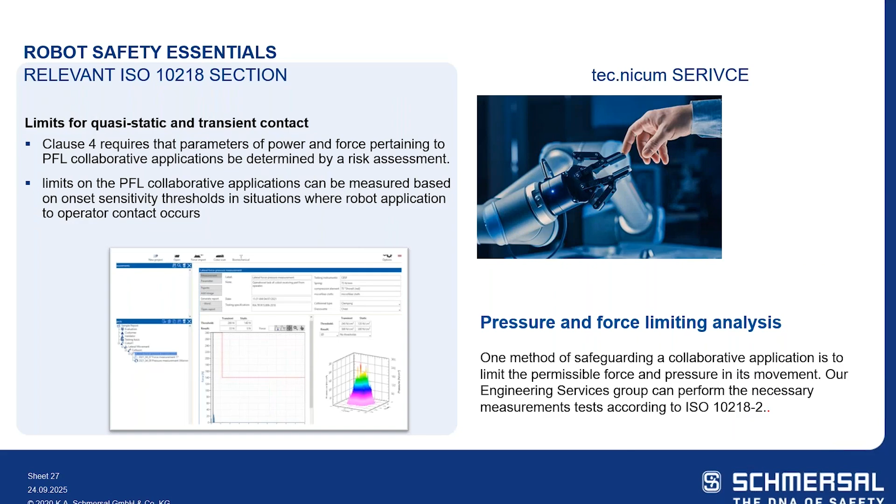When we look at this idea of the Class 1 collaborative applications, as we mentioned before, the standard calls out certain pressures and forces that we cannot exceed to be able to use this as a true collaborative application, with that robot in the same working envelope as the operator. So yes, tec.nicum offers that service to go on site to perform the pressure and force tests on those Class 1 robots, to make sure they can be used side by side with the operator. Those tests would confirm, if there was contact, that those pressures and forces do not exceed what's called out within the standard.

Okay, we are at the hour mark. Quick update on ANSI R15.06. Obviously this webinar was about ISO 10218, but just to give you a quick update on ANSI/A3 R15.06, which is the American, North American version of the robotic standard, that standard has been published as of earlier this month.

In February of this year, ISO 10218 was published. Earlier this month, ANSI A3 was published, and it was completely harmonized to ISO 10218. Everything we spoke about for ISO 10218, you will see inside of the ANSI A3, completely harmonized. What we hope to see by the end of this year is an ANSI/A3 R15.06 version, part 3, which looks at the requirements for the user. Part 1 is the design, part 2 is the integration, part 3 will be for the user.

As you would expect, once that's published, we will have another webinar, if not at the end of this year then next year, probably next year, to go over those changes, or in this case, what those new requirements are from this new part of the standard.

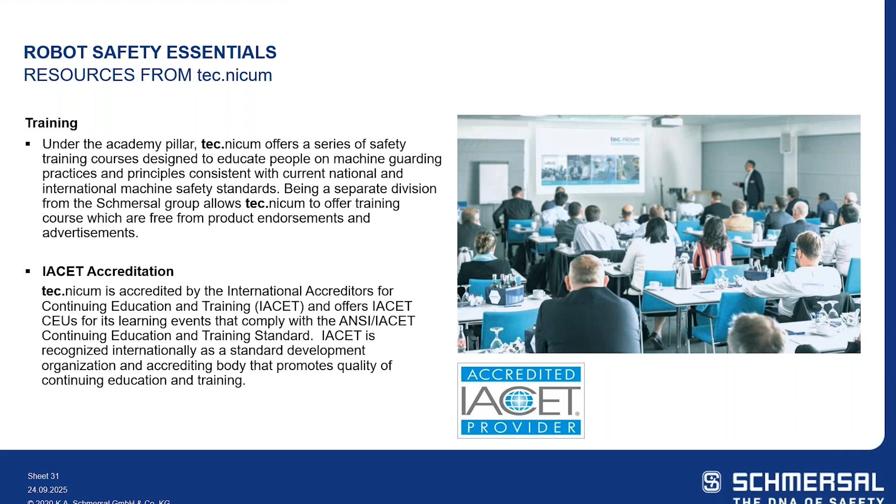Really quick, some resources that are available to you. Going back to tec.nicum Services, we offer training, full-blown training for machine safety, training on the standards, training on risk assessments. Everything we spoke about today at a high level for this one-hour webinar, we can go into full detail with the training. And our training is accredited by IACET, so we are able to offer continuing education units. We are really proud of our training program that we offer within tec.nicum.

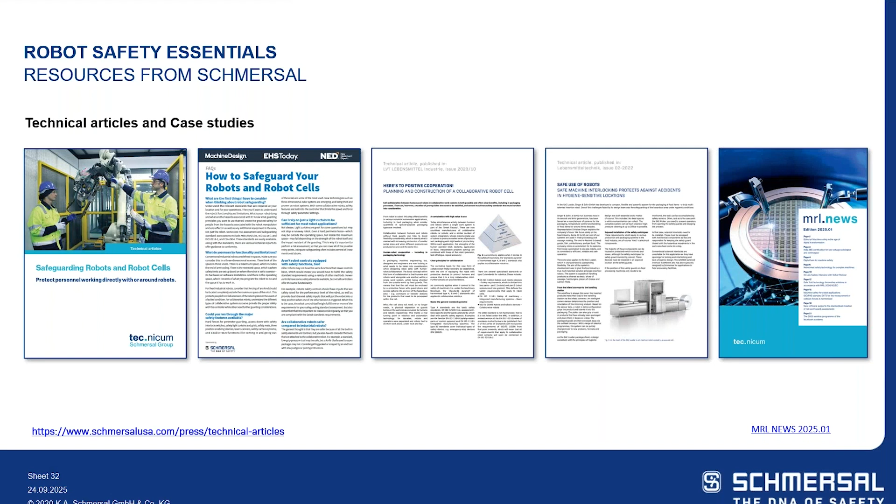More resources are available to you, and we have the link down there. I think some of these are in the handout, but we have some technical articles related to safeguarding robots and robot cells. We have some white papers that were published inside of EHS Today that you may have seen; if not, we have the links and can provide those to you. We also provide MRL news through Schmersal, which is chock full of useful information for machine safety in general, and of course we have that link specifically for robot safety.

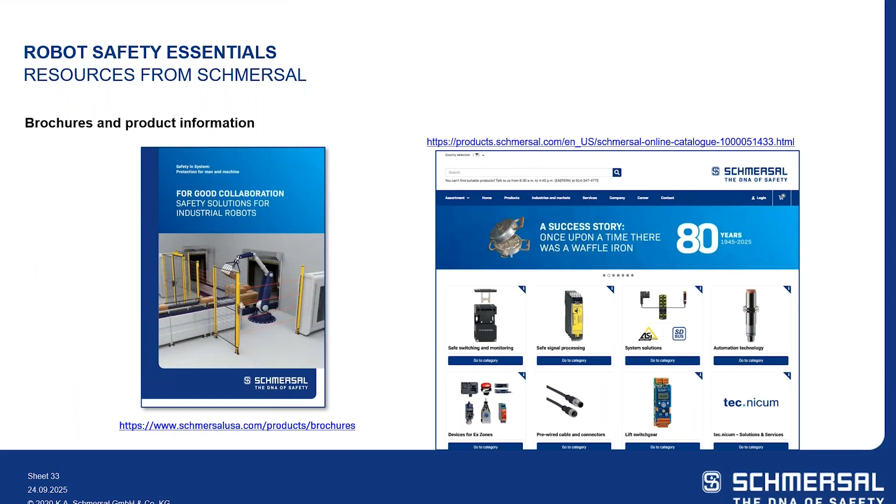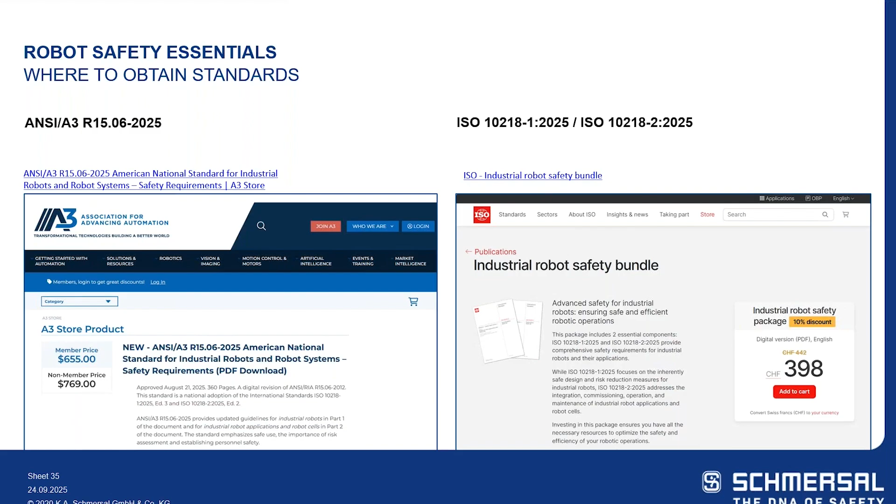We are over the time, and I do apologize. Some questions came in; we'll definitely get back to you and answer those via email. I apologize, but hopefully the information was useful and helpful to you. Thank you for the questions, and thank you for your time.